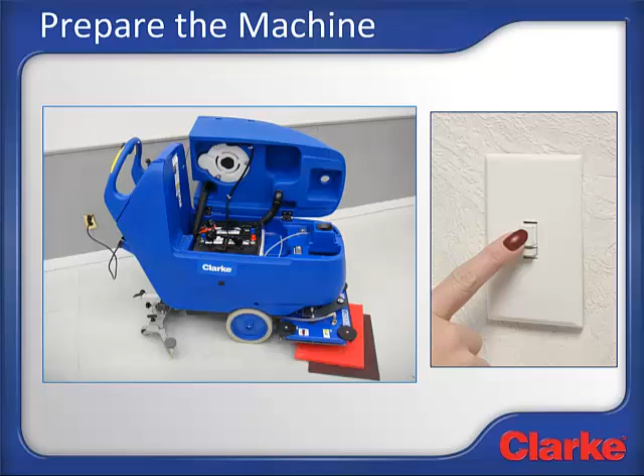First, we'll turn on the light in the room in which the machine is stored. The first thing you should see is the machine parked with the recovery tank open, the machine plugged to a standard 110 outlet, charging the batteries, and no pad or brush installed on the machine. This is how the machine should have been left after it was used last.

The first step is to unplug the battery charger. The charger cord should be stored using the convenient cord wrap holder. During charging, the recovery tank should be left open for air circulation. Now the recovery tank can be lowered to its normal operating position.

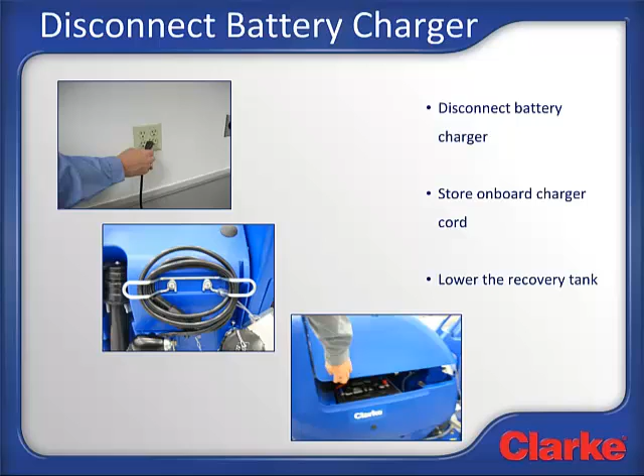The next step is to inspect the brushes or pads. These should have been rinsed the last time the machine was used, so they should be relatively clean and free from any debris. Inspect the pads or brushes and determine if there's enough brush or pad life for the scrubbing that you're about to complete, and if not, replace the pads or brushes as needed. Also make sure you have the correct pad or brush type for the scrubbing that needs to be performed.

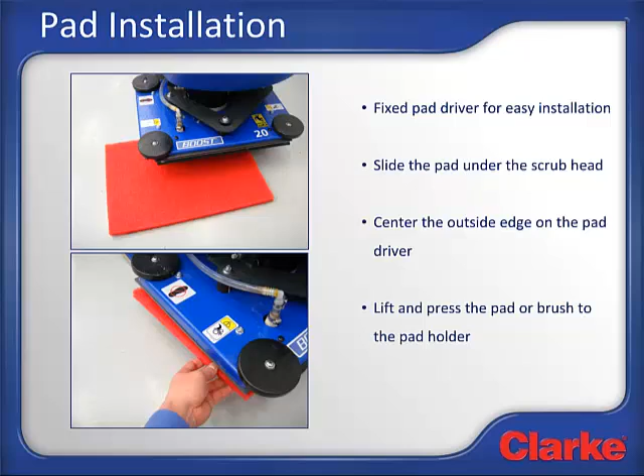Now install the pads or brushes on the machine. This machine features a fixed pad driver, so it's super easy to install the pad or brush. With the pad in hand, simply slide the pad or brush under the pad driver. Center it on the outside edge of the pad driver and lift up and press on the pad or brush. The grip face on the pad driver will hold it in place.

Make sure the recovery tank is empty. Check the ball float cage and make sure it's clean and the ball moves freely. A clip on each side of the cage has to be opened to remove the ball float cage.

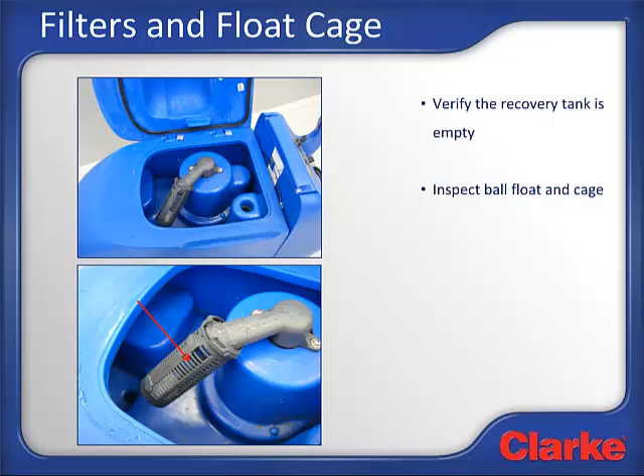Then inspect the rear blades to make sure that they're ready for use and aren't torn or nicked. The machine features a 4-sided squeegee blade that has 4 working edges, so the blade can be flipped end for end or flipped top to bottom to expose a fresh working edge, all without tools. If all 4 edges are damaged, a new squeegee blade is needed.

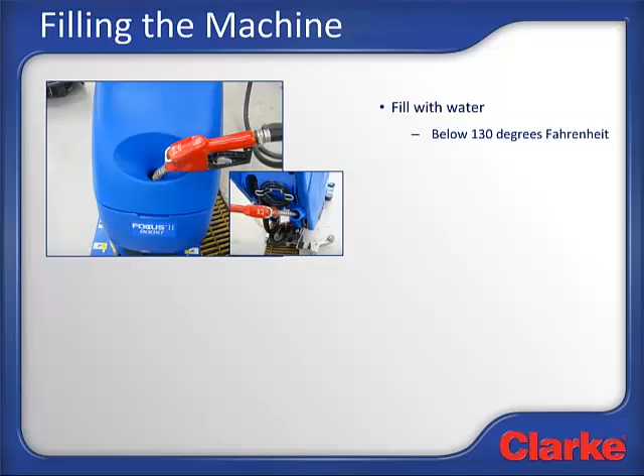Attach the squeegee to the machine with the 2 thumb nuts and attach the squeegee hose. Do not over-tighten the squeegee as it's designed to break away if it hits an object. Now we're ready to fill the machine with water. Hot or warm water cleans better, but the water temperature should not exceed 130 degrees Fahrenheit.

If using the onboard detergent system, fill the machine with pure water only. Inspect the onboard detergent cartridge and verify that the correct detergent is in the cartridge and that there's enough detergent in the tank to complete the scrubbing task. If an off-board detergent dilution system is used, like a wall mount station, fill the machine from this device.

If bulk detergent is to be mixed in the tank, fill the machine a third of the way up, then add the detergent and fill the machine full. In all cases, fill the machine so that the solution level is an inch or 2 below the fill port.

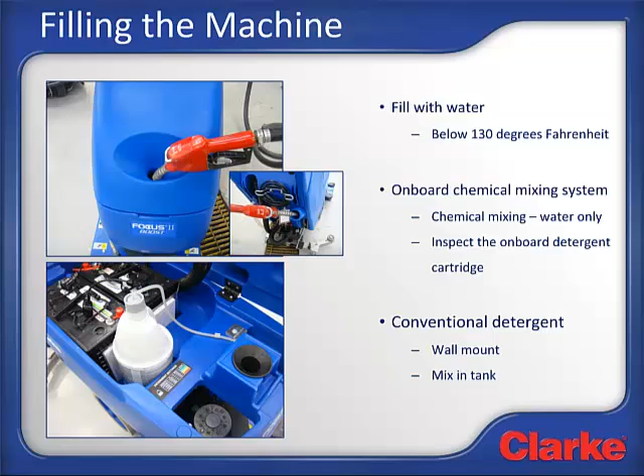Before we get into the details of how to run the machine, let's take a moment to see all the switches on the control panel. I'll start in the upper left corner and move left to right. First is the true one-touch switch, which starts and stops scrubbing.

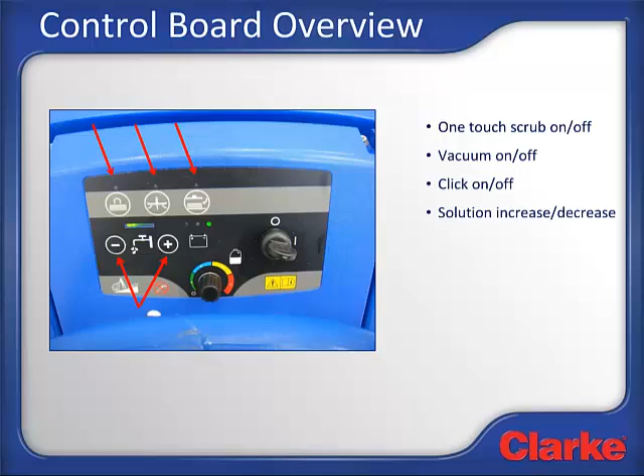Next is the vacuum on-off switch. Then there's the click brush switch. This switch is only active on Clarke disc machines and is disabled on the Boost model. On the bottom row, we have the solution increase and decrease switches.

The battery gauge is in the middle, and to the right of that is the onboard chemical dial knob used to select one of 4 preset detergent settings. And last but not least is the key switch.

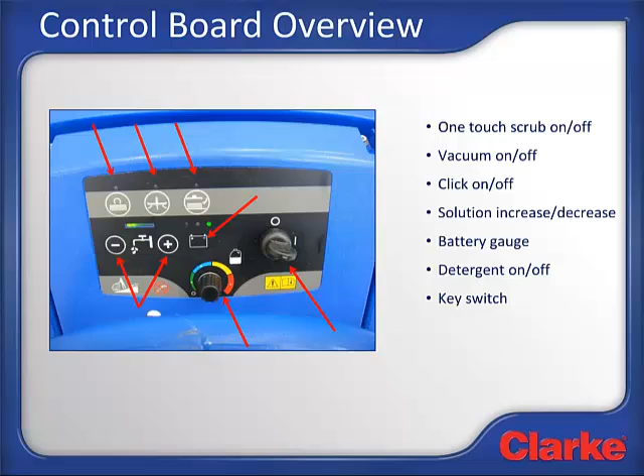We're now ready to transport the machine to the area to be cleaned. Turn on the machine using the key. Verify that the machine has enough battery power to complete the scrubbing task by using the control panel battery gauge. The machine is controlled by 2 safety yellow palm switches located on the handlebar.

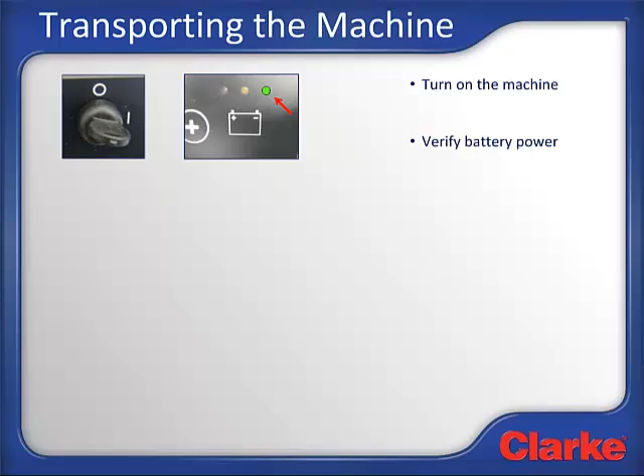You can dial in the correct speed for the job by simply turning the dial on the speed control potentiometer. The potentiometer sets the maximum speed for both forward and reverse. Set the potentiometer about halfway between the slowest and fastest speed.

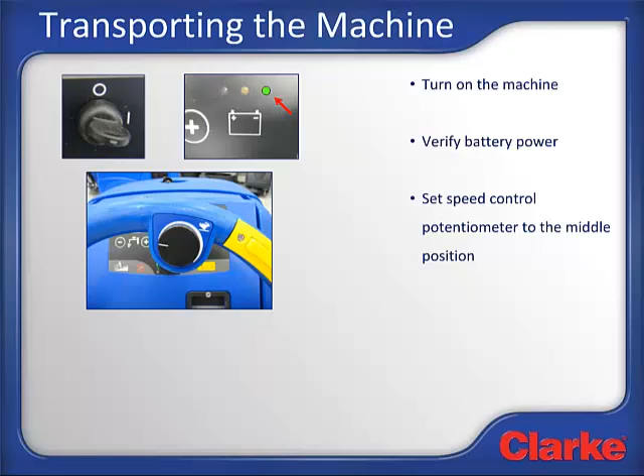To get the machine to go in reverse, simply push the white button on the back side of the handlebar, followed by one of the yellow palm switches on the handlebar. To make the machine simple to use, it features true one-touch scrubbing. The press of a single button both starts and stops the scrubbing function.

To start scrubbing, lower the deck to the floor using the foot pedal on the rear of the machine. Then, lower the rear squeegee to the floor. Now, press the true one-touch scrub button. This will enable all the systems for use and turn on the vacuum motor.

Depressing the yellow safety switches will start the actual scrubbing function. The machine will move forward, water will begin to flow, and the brushes will begin to spin. To pause scrubbing, release the yellow safety switch and the machine, solution flow, and brush motor will all stop.

To stop scrubbing, simply press the one-touch scrub button again. The motor will shut off after a 10-second delay. Now, lift the deck from the floor and raise the rear squeegee.

The Boost features 2 scrubber pressure settings, regular and extreme. The regular setting is when the deck is in the free floating position. This is the setting used for most cleaning tasks and will give you the longest run time. Extreme scrub is enabled by moving the deck foot pedal up and into the lockdown position. This is for the heaviest soils and used for stripping.

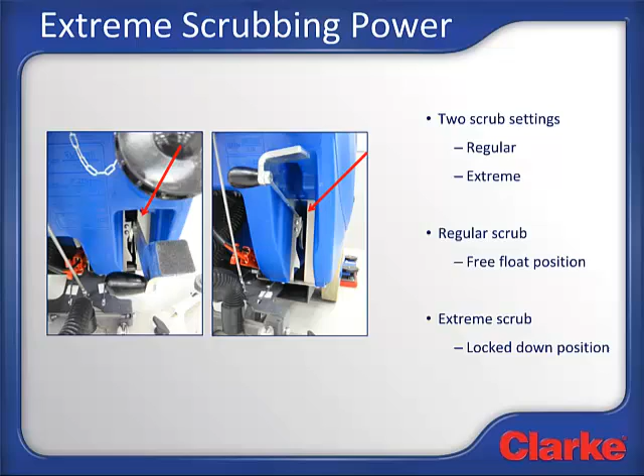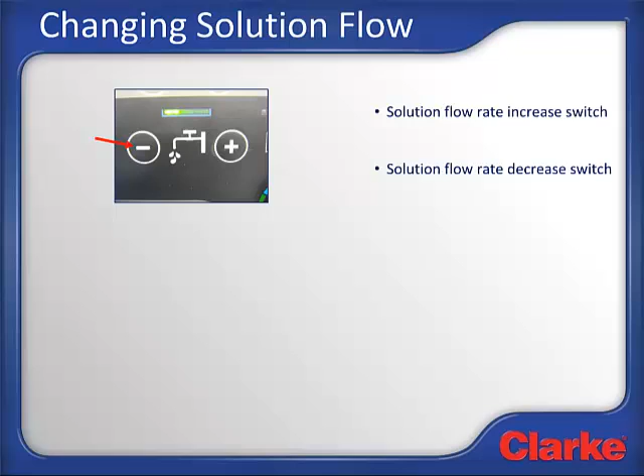If the solution flow rate needs to be adjusted, it's simply a matter of pressing the solution flow rate increase switch or the flow rate decrease switch. There are 3 flow rates, low, medium, and high. Each setting uses 2 LEDs, so low is indicated by 2 LEDs, medium by 4 LEDs, and high will light all 6 LEDs. To turn solution off, simply press the solution flow rate decrease until all the LEDs are extinguished.

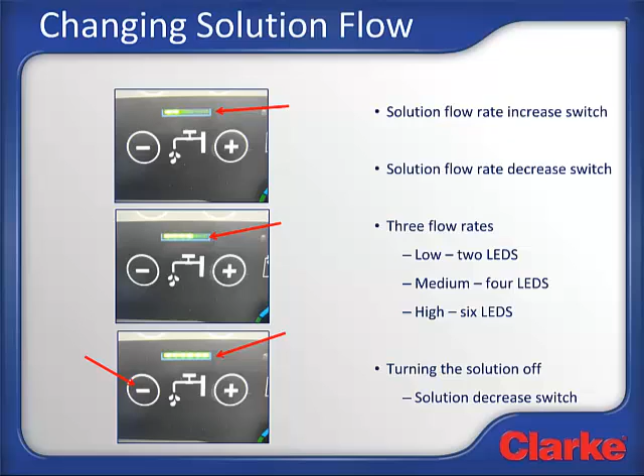One of the top features of this machine is its ability to have an onboard chemical mixing system. When looking at the control board, you'll see a turnstile knob that has 4 color options and a circle to the far left for off. This machine comes preset with 4 detergent settings that can be adjusted on the fly by simply turning this knob.

The 4 preset settings are green, 250 to 1, or 40%. Blue, 133 to 1, or 75%. Yellow, 66 to 1, or 1.5%. And red, 33 to 1, or 2.5%.

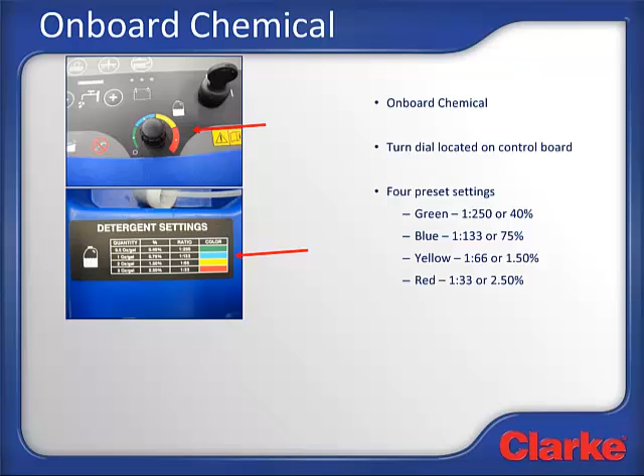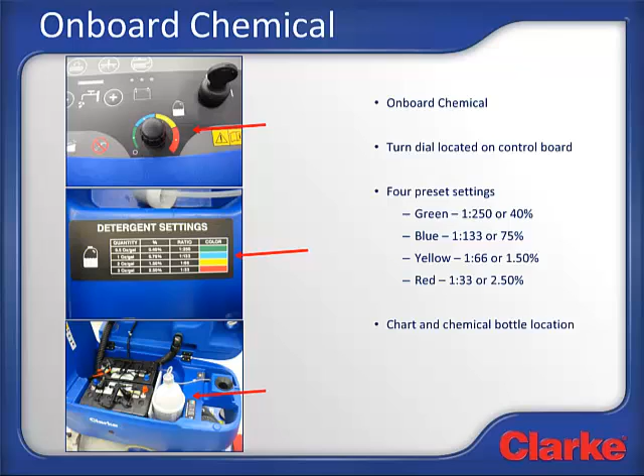To locate the color chart and the chemical storage location for the chemical bottle, simply lift up the recovery tank. Being that the chemical bottle and chart are under the recovery tank, it's important that you write down or memorize the preset settings and make sure the chemical bottle is full before you start your job.

The Focus Boost is super effective as a daily cleaning machine due to its random orbital scrub pattern. In addition to that, it's also very effective at removing or stripping off old floor finish using nothing but pure water. To strip a floor, you'll need a standard red pad and a maroon surface prep pad, or SPP.

The red pad is placed on the machine just like you would for daily cleaning. The maroon pad is then sandwiched between the red pad and the floor and is simply held into place by the extreme pressure of the machine. Stripping the floor is really not much different than scrubbing the floor with a few exceptions.

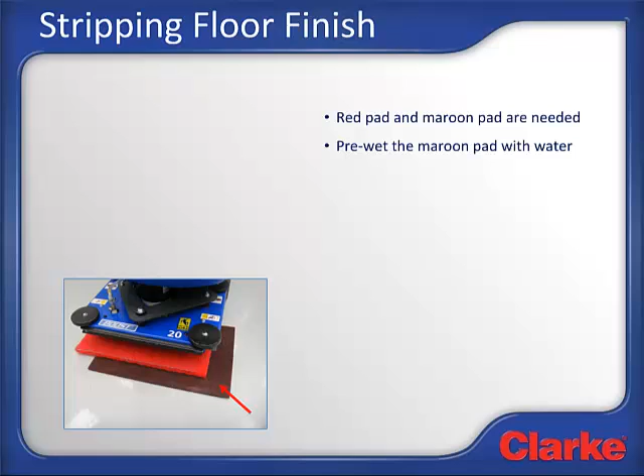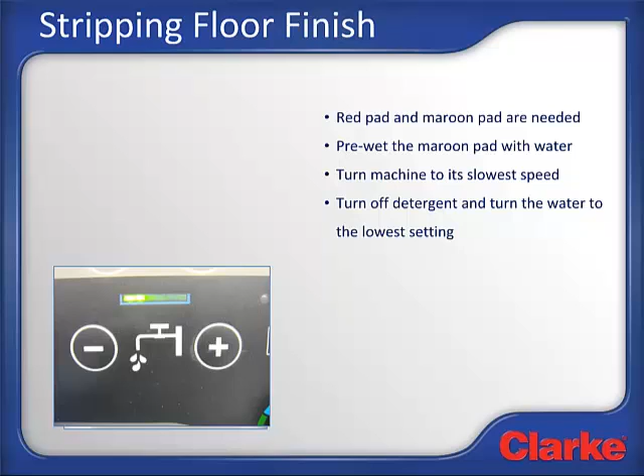The best practice is to pre-wet the maroon pad using the machine's solution dump hose and then place it under the red pad. Now, turn the speed of the machine to its slowest speed. If you're using detergent, turn it off, and set the solution flow rate to the low flow setting. Always use the extra pressure setting when removing floor finish.

Now start scrubbing and adjust the speed to a very slow walking pace. The slower the machine moves, the more aggressive the action will be on the floor. Aim for 60 to 100 feet per minute and adjust as needed to get the desired results.

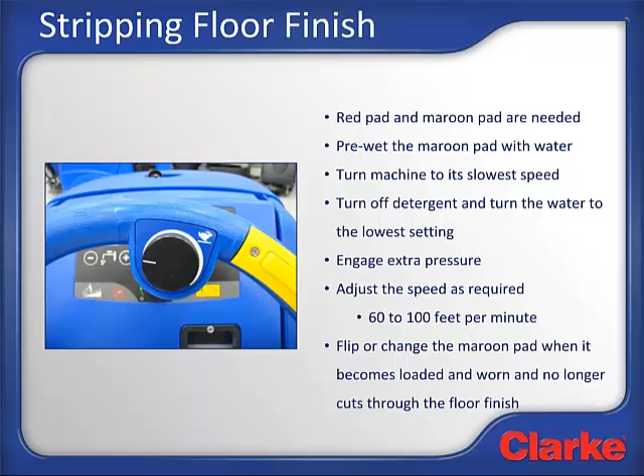Eventually, the solution tank will run dry and the recovery tank will become full. As we learned earlier, the machine has a ball float valve that protects the vacuum motor from ingesting water. Once the ball float activates, the vacuum motor pitch will change to a higher pitch sound. When the recovery tank is full, transport the machine to a suitable location to empty it and refill the machine if required.

After using the machine for a while, one of two things may happen. The battery becomes depleted and the machine must be recharged. When this happens, the battery gauge will indicate the batteries need to be recharged and all scrubbing functions will cease. The machine stops scrubbing when the battery pack has become depleted, but the transport function does not. This means you'll always have plenty of battery power to transport the machine to the area to empty the recovery tank and back to the charging station.

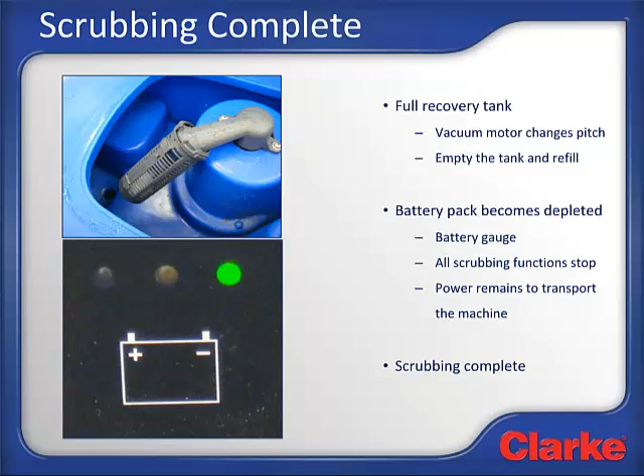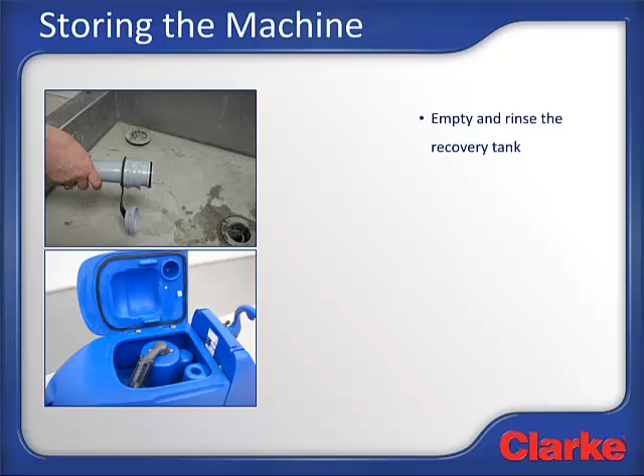The other thing that may occur is that the areas that need scrubbing are now scrubbed and clean, and the machine is ready to be put away until it's needed again. Just like we learned earlier about preparing the machine for scrubbing, we're now going to do the opposite procedure to prepare the machine for storage. The first thing to do is to empty the recovery tank and rinse it out thoroughly to remove any and all debris from the tank. While you're at it, rinse off the ball float cage and make sure it's cleaned off.

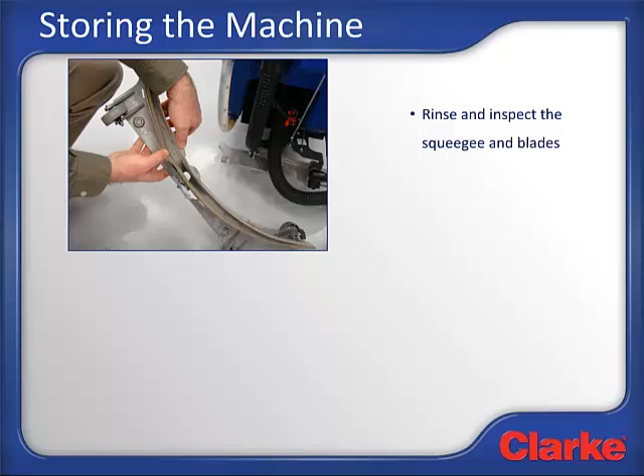Now you can rinse off the squeegee and inspect it to make sure the blades are not ripped or torn. If they need to be changed or replaced, do that now. We don't want to leave maintenance activities like replacing worn items for when starting a new day. Remove the brush or pad and rinse them off and remove any large debris that may be present. Inspect the pad or brush and see if the pads need to be changed or flipped over and check to see if the brushes need to be replaced. If they do, do that now also. Set them aside to dry.

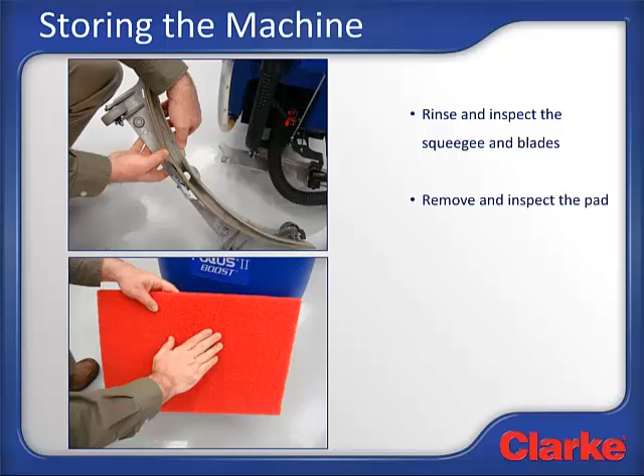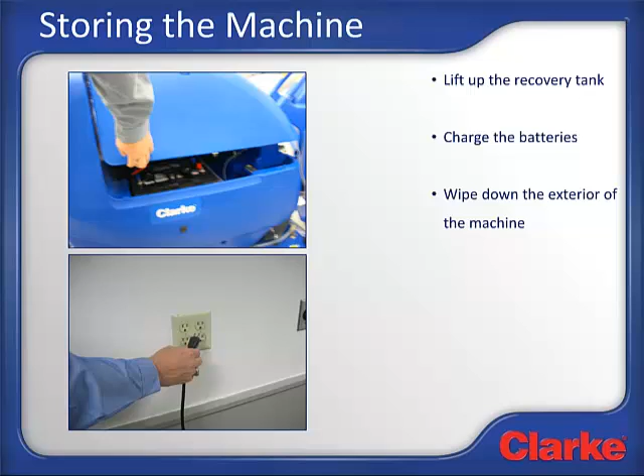Lift up the recovery tank so that air circulation can occur. Then, unroll the power cord and plug the end into an outlet so that the batteries will be charged for the next person who needs to use it. It's also a good idea to take a wet rag and clean off the exterior of the machine. And remember to turn off the light when you leave the room.

Besides the maintenance that's done on the machine on a daily basis, there's also maintenance required periodically. Weekly, one should check the water level of each battery cell and add distilled water as needed. The machine should not be charged if the plates are not under water. Before charging, inspect the cells and make sure none of the plates are exposed. If they are, then just add enough water to cover the plate, but do not fill the cell all the way until after the machine is fully charged.

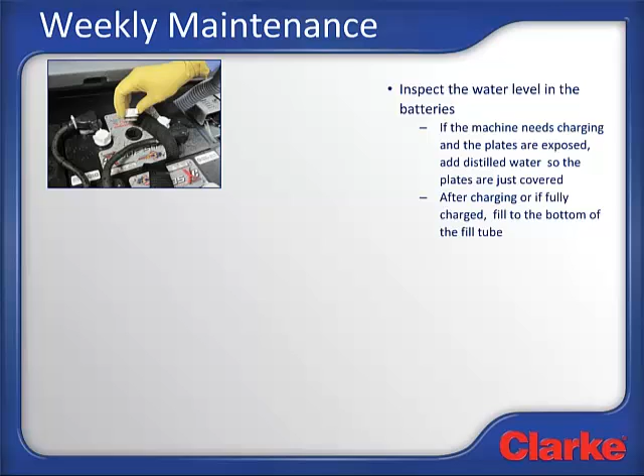If the machine is fully charged, then add water so it touches the bottom of the fill tube in each cell. Do not fill the cell to the very top of the battery. Clean the solution filter. Clean the foam vacuum exhaust filter located on the underside of the vacuum motor under the recovery tank. And purge the onboard chemical mixing system with plain water.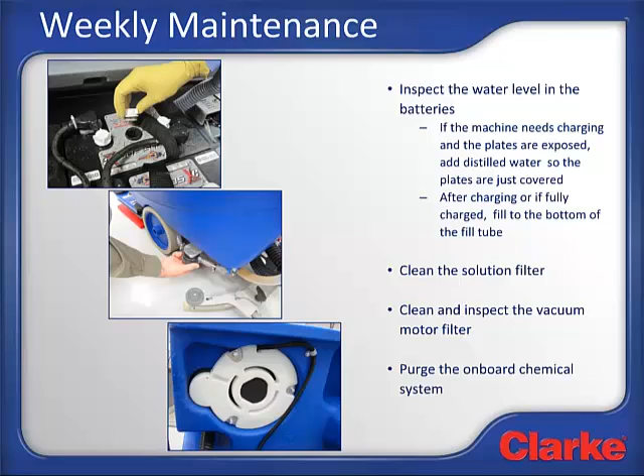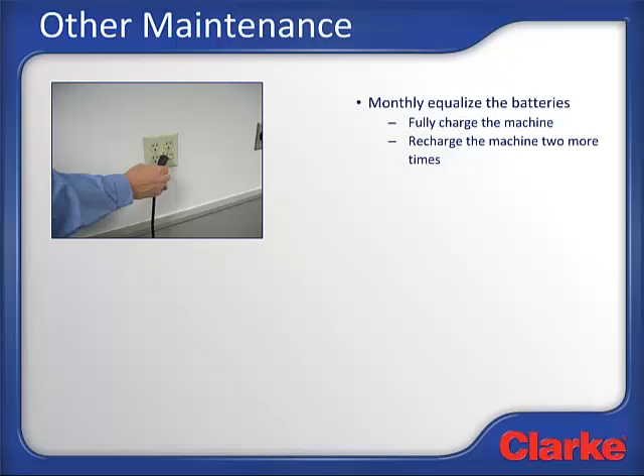Monthly, the battery pack should be equalized. Equalizing the battery ensures each cell is at its maximum charge potential for maximum runtime. This is done by fully charging the machine and then unplugging it. After a minute or two, plug the machine back in to charge it again. Repeat this two more times. After 1 year of use, the carbon brushes in the vacuum motor should be inspected for wear, and at the same time, inspect the carbon brushes on the scrub motor to see if they need to be replaced. Refer to the operator's manual or a Clarke authorized service center on carbon brush replacement.

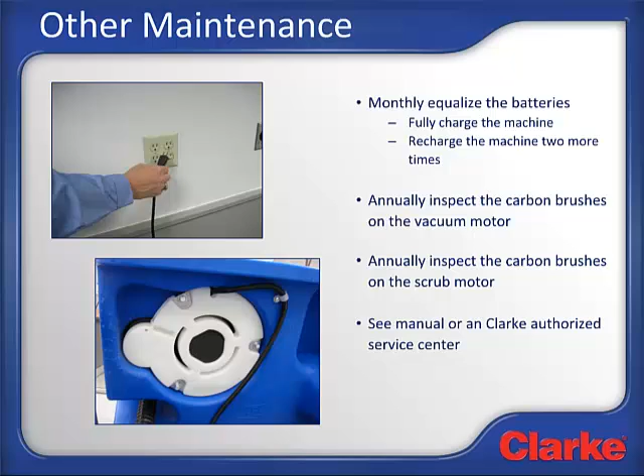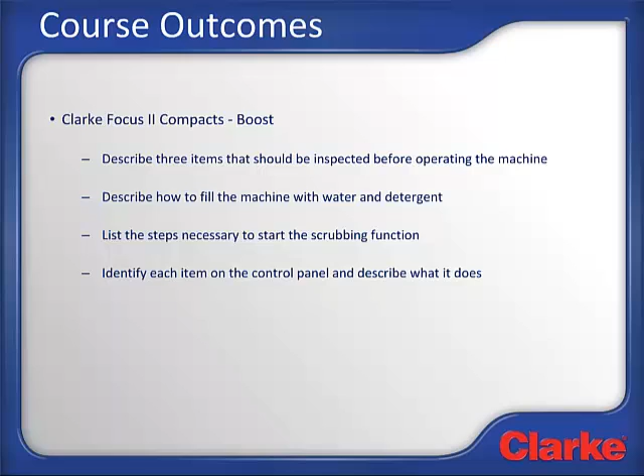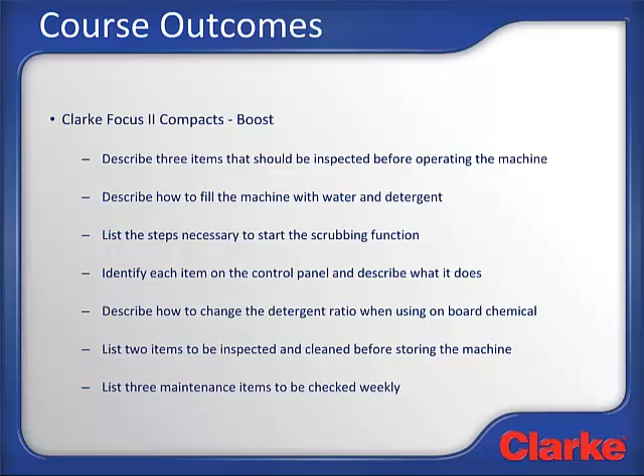This concludes this use and care lesson for the Clarke Focus II Compacts Boost model. If you have successfully retained the information provided in this course, you'll be able to describe 3 items that should be inspected before operating the machine. Describe how to fill the machine with water and detergent. List the steps necessary to start the scrubbing function. Identify each item on the control panel and describe what it does. Describe how to change the detergent ratio when using onboard chemical. List 2 items to be inspected and cleaned before storing the machine. And list 3 maintenance items to be checked weekly.